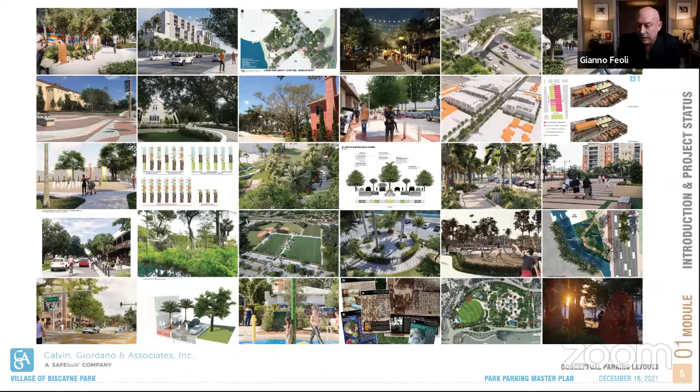So with that, I want to go ahead and do an introduction. I think everybody already knows who we are as Calvin Giordano Associates. We are a multidisciplinary firm, experienced in providing cross-discipline landscape architecture, engineering, and planning services. As the manager said, one of the things we were charged with was to...

Look and study the opportunities to formalize the parking and increase opportunities to protect the existing trees. Right now, as it stands, you just have a swale and people park at their discretion. At times, the existing sidewalk that runs around the perimeter of the park is in conflict with some of those parking arrangements, which creates a situation where you compromise your ADA accessibility for the facility.

Tonight's workshop is not a decision-making workshop. Tonight's workshop is an informational workshop. Following this workshop, once we hear comments, feedback and discussion, we will put together a schematic plan to take to commission for further discussion, and then we will put together revisions and bring it back to commission for final adoption.

Some of the considerations that we took on from the onset when we started the project was making sure that we do not negatively impact the ADA parking that already exists.

That ADA parking is there to serve the rec center building, and we want to make sure that we're not going to be impacting those. So we have excluded any improvements on the northwest corner of the block in front of the rec center, particularly because we don't want to impact that ADA condition.

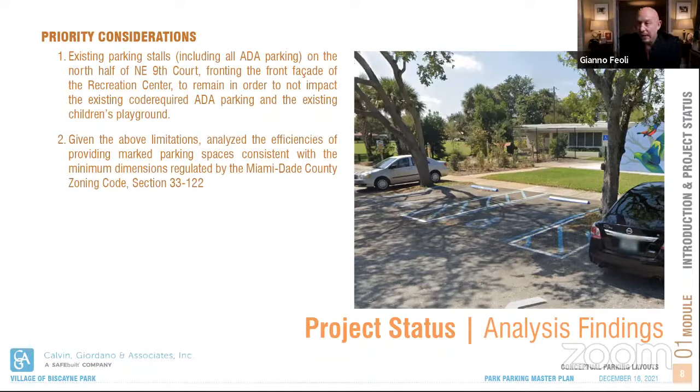In addition to that, we took a careful dive into the Miami-Dade County Code. The moment that we formalize parking, we now need to meet code requirements. The Miami-Dade County Code essentially has two stipulations we need to meet. One is the minimum dimension of the parking spaces, stated as 8.5 feet by 18 feet deep. Depending on if you're parking at an angle, parallel, or perpendicular, you have to have what's called a parking aisle, which is a clear space where a car can back out when exiting the parking space. So those were considerations we had to take into account.

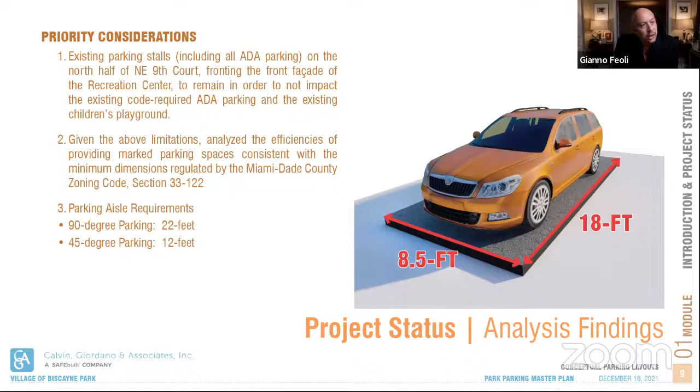And we have some solutions that we want to share with you. But I think the most critical of the conversations tonight is around trees and preservation of trees. I will say that we do not have the most ideal of situations because the trees are large and pretty majestic, but because they are there, we have to make sure that any kind of formalization of the parking is not going to negatively impact any of the existing tree roots.

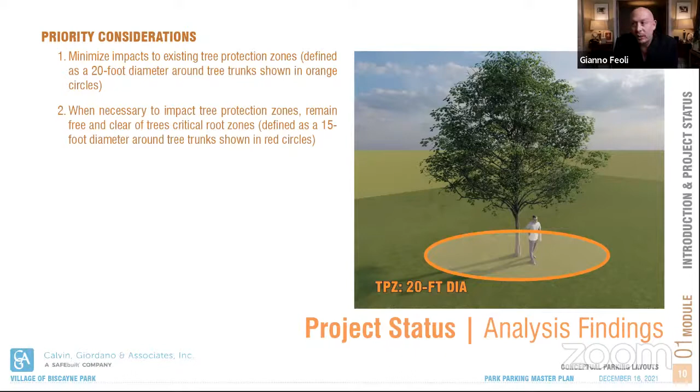So what we've done, in an effort to build a standard to apply to the park, is identify two different zones. One we're calling the tree protection zone, identified as a 20-foot diameter. Within that, we're identifying what we're calling a critical root zone at a 15-foot diameter. Now, a tree protection zone, best management practices recommends that you have a 1-foot radius of tree protection zone per inch of DBH, that's per inch of the diameter of the trunk of the tree.

So a lot of these trees are pretty large, they exceed 20 inches. If you have anything greater than a 20-inch diameter tree, then from best management practices you have a requirement to have a 40-foot diameter tree protection zone. Generally you have that proportional relationship with the size of the tree, and you generally don't take it beyond the drip line of the canopy.

For the critical root zone, generally those areas are defined from best management practices at 50% of what that dimension of the tree protection zone is. So you identify the tree protection zone based on the size of the tree, and half of that closest to the trunk you absolutely try not to touch, because those are the critical areas where the tree roots are.

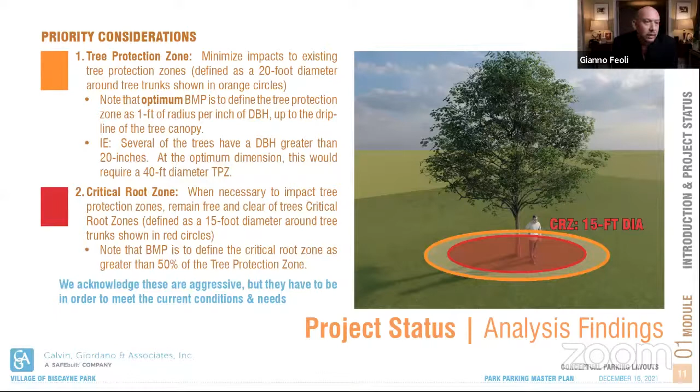Now, we know and acknowledge that having a 20-foot diameter tree protection zone around trees is a very aggressive stance. But when we look at the existing conditions, where trees are generally spaced anywhere between 18 and 35 feet apart, mostly on a 30-foot on-center spacing, if we were to go with best management practices, you essentially would have the entire swale of the majority of the perimeter of the park within a tree protection zone, and you wouldn't be able to do anything. So what we did is consult with some of our certified arborists.

They have done work in park areas and roadway improvements, and they suggested that if we stay 10 to 15 feet away from the tree trunk, that could be a reasonable accommodation that we could do. It's not ideal, but given the circumstances we're facing, that would be acceptable.

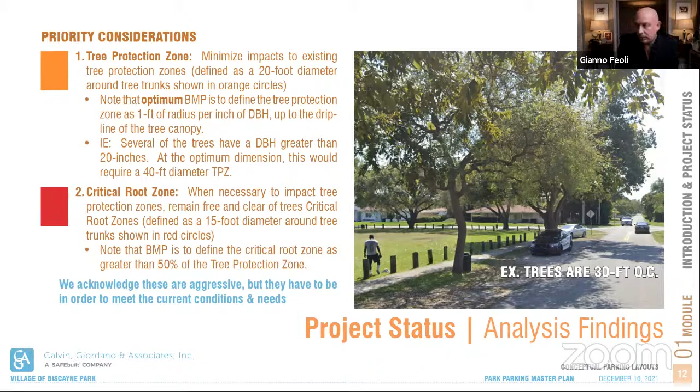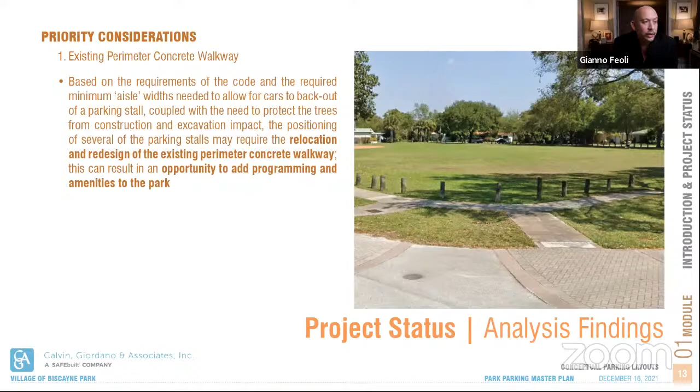In addition to that, the perimeter walkway that goes around the park at times is 15 to 20 feet away from the edge of the asphalt of the roadway, and at times is 10 feet away. So in order to accommodate parking, the location and alignment of that walkway will need to shift depending on the parking strategy and arrangement we're looking for.

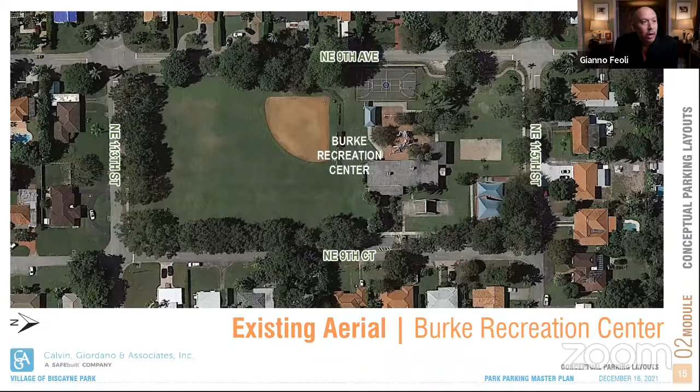So let me share with you some conceptual parking layouts, talking about all the parking around the entire rec center and the park area. When we look at all four sides of the park, no four sides are the same. In fact, you have variations along each frontage. At times you have swales being used for parallel parking, at times you have formalized perpendicular parking.

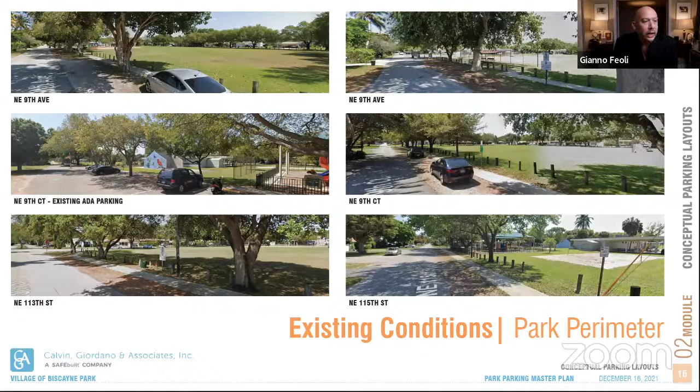And what we're trying to do, being conscientious of the economics of it, is keep as much of what you already have formally, and then look to see where we can augment the opportunities to maximize the parking.

So as we looked and did some analysis, we recognized that there are issues with the swales being overshaded, which means the sod will never grow there. And whatever we plant needs to be shade loving.

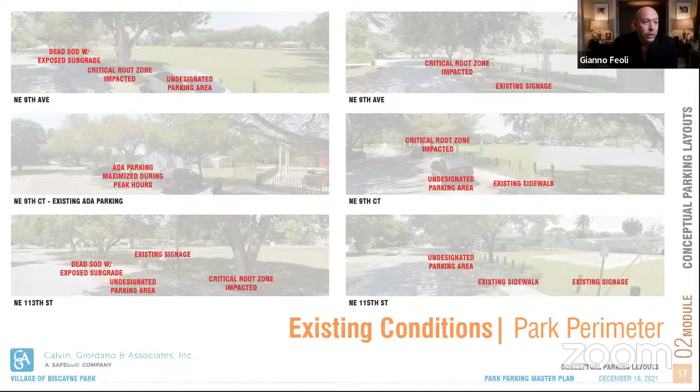We recognize that there's conflicts with the trees right now because there are no tree guards. We have observed people parking as close as a foot away from a tree trunk, which is extremely undesirable because as the cars park in those areas, what they're doing is further compacting the soil.

I'm going to share with you four different parking concepts.

Ranging from different strategies, looking at angled parking, looking at perpendicular parking. And what we were able to find is that at a minimum, we were able to achieve 51 parking spaces, and at its maximum, we could get as much as 64.

So I think that part of this also needs to be some feedback from you as to what is an acceptable carrying capacity that you want to have for your parking. Do you want to maximize all the opportunities for parking because you have that much demand? Or is there an opportunity to pick and choose where we want to put the parking so that maybe the parking target numbers are not as high?

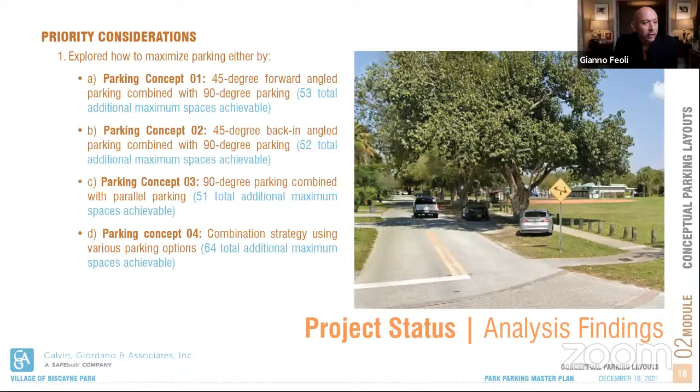And the one at the northwest corner at 9th Avenue and 115th Street already exists in that configuration, and we thought that it would be best to leave it in that way.

We then looked at, well, what happens if we only do 45-degree back-in parking? And that gave us a total of 52 parking spaces.

And then we looked at what parking counts we could achieve only doing parallel parking, parallel to the travel lane. Those gave us a total of 51 parking spaces. This is probably the least invasive of the strategies, but they gave us some similar numbers.

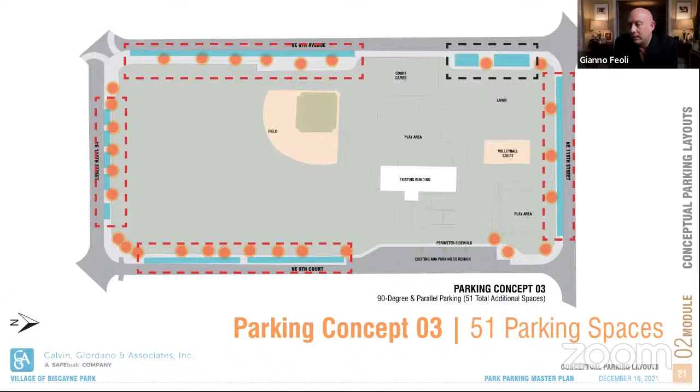So what we did was look at a combination, a hybrid of each of them, so that the areas shown in blue would all be parallel parking, because that would provide the least amount of impact on the existing sidewalks. The areas in purple would be angled back-in parking, particularly because Northeast 9th Court is a one-way and is a very narrow travel lane.

So if we were going to do drive-in parking on Northeast 9th Court, we would essentially have to push the parking further into the park in order to meet the aisle requirements that the county code has in place. And then the ones in red are the areas that we thought could accommodate perpendicular parking, 90-degree pull-in parking, typical like what you see in a parking lot.

We then looked at, all right, now that we've quantified what the maximum number of parking could be, which is 64 parking spaces, and this is in addition to whatever already exists in front of the rec center. Remember, we're not touching the ADA parking that already exists in front of the rec center.

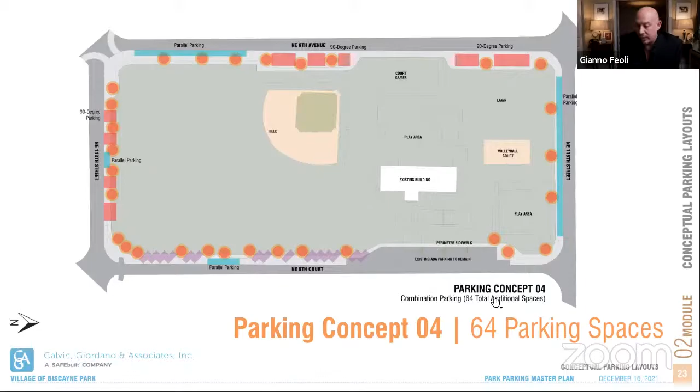We then started to look at, all right, how can we best protect the trees, and what can we do around the trees in order to minimize any kind of impact? It would be unrealistic for me to commit to you that any construction would not impact the trees. They all will. The effort here is trying to minimize what that impact could be.

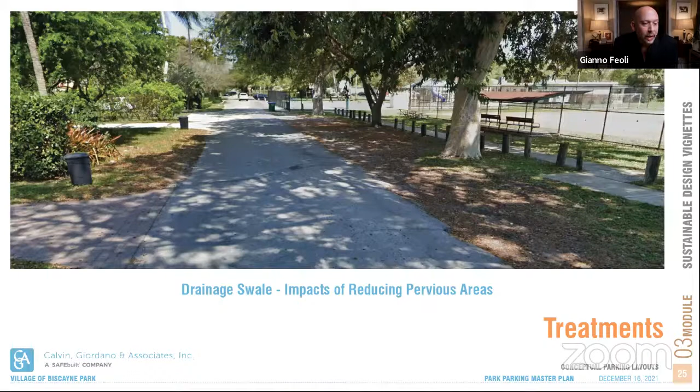Another thing that's really critical to consider is the fact that all of your swales are drainage swales. So we cannot pave over your swales, because then we may potentially cause a drainage issue and a flooding issue in the village. So we can only look at trying to increase some level of formalization for the parking while keeping some degree of perviousness so that the water can still percolate and drain in the natural form that it currently does.

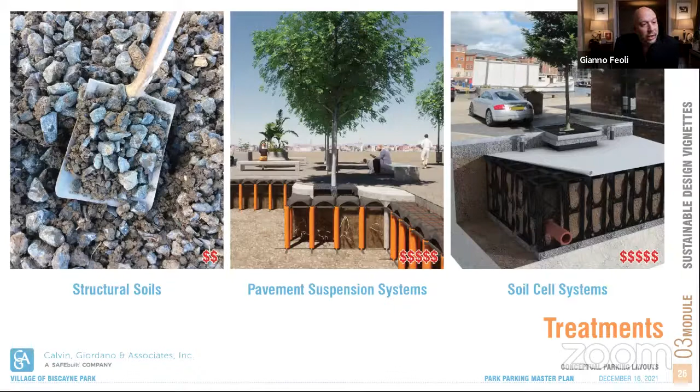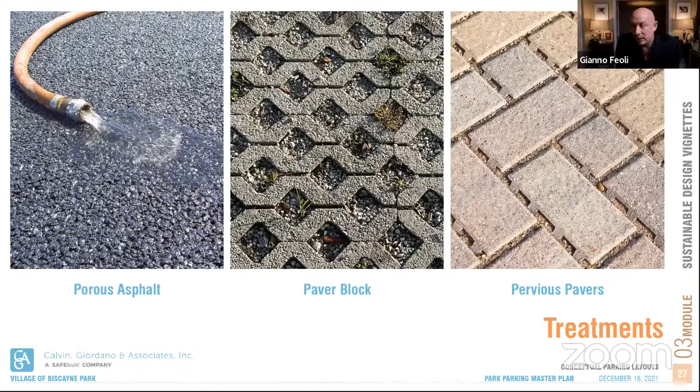Now, there are pros and cons to each of these different surfaces. For the asphalt, it can be done with some minimal excavation. It is going to require a subbase, and that depth will have to depend on a geotechnical analysis of the soil to find out what its compressive value is.

The great thing about porous asphalt is that if there is any settlement, you can always come back and patch it, which is something you cannot do with the other finishes. It can be easily striped, so you can easily get the designation for the different parking aisles. The only maintenance you really have to do is patching for any settlement, and periodically you need to vacuum it so that if there's any dust, settlement, or dirt in the asphalt, you can suction those out to maintain as much of its performative quality as possible.

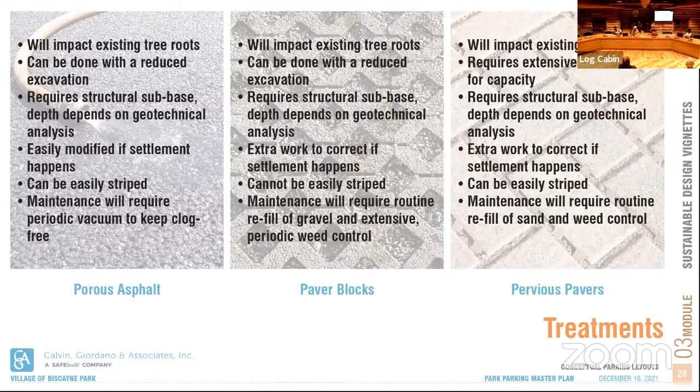Sorry, can I interrupt you for one second? Sure. Can you go back a slide? On the far right, on pervious pavers, you said that they cannot be easily striped, but your slide says that they can. Oh, I'm sorry, that's a typo. It cannot be easily striped because of the perviousness and the gap between the pavers—the striping gets interrupted. It just doesn't look very clean.

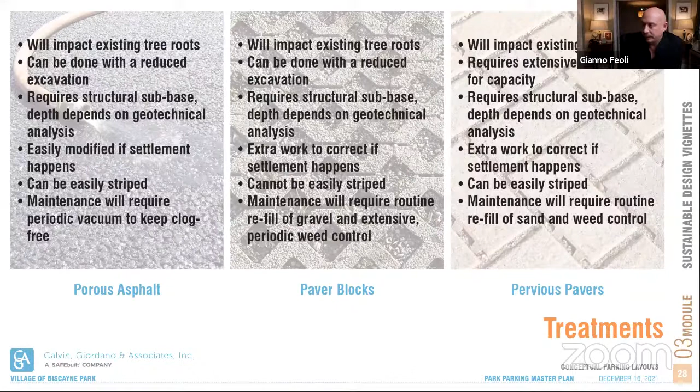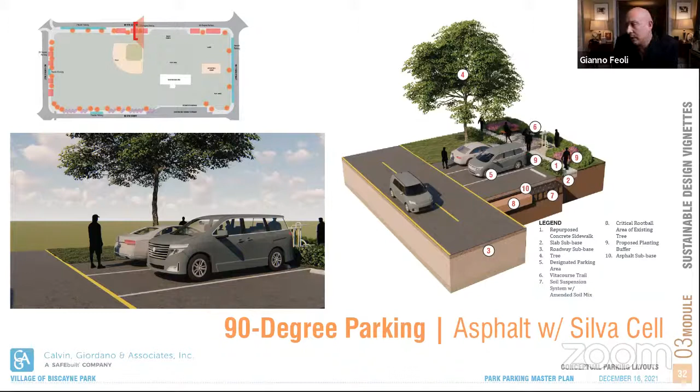Let's look at some of these scenarios so we can get a sense of what they will look like. With regards to 90-degree parking, when we look at existing conditions, there are generally two conditions we find: one where the sidewalk is pretty close to the edge of the travel lane, and one where it's separate. When we look at asphalt 90-degree parking over Silva Cell, it gives you a pretty clean look, very typical to the kinds of looks we're accustomed to. The only thing that really changes is the finish on top, because the system underground isn't visible.

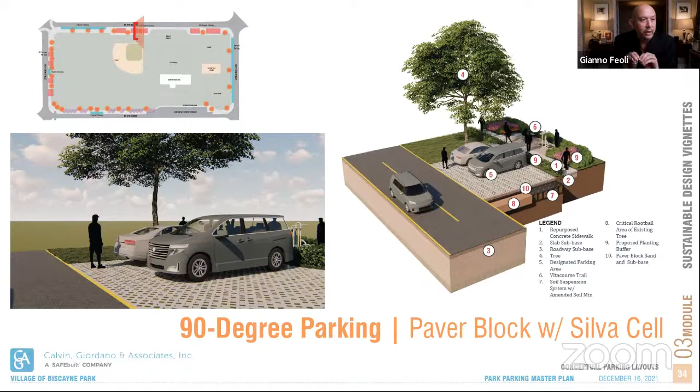So this is what it will look like with pavers, and this one with the paver block. Again, it's not going to have that sort of stippling of the green in the way it's shown in the rendering—we had to put that in just so it could be legible, but a reminder that because there's so much shade, the grass is just not going to grow. You're going to end up with gravel there.

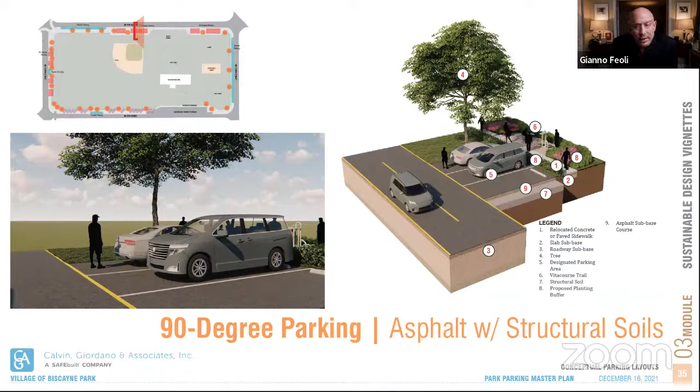When we change the system from Silva Cells to structural soils, the look is exactly the same, but the performance is different. So when we look at them for the asphalt, for the pavers, and for the paver block, it essentially looks the same—it just performs differently because of what's underground.

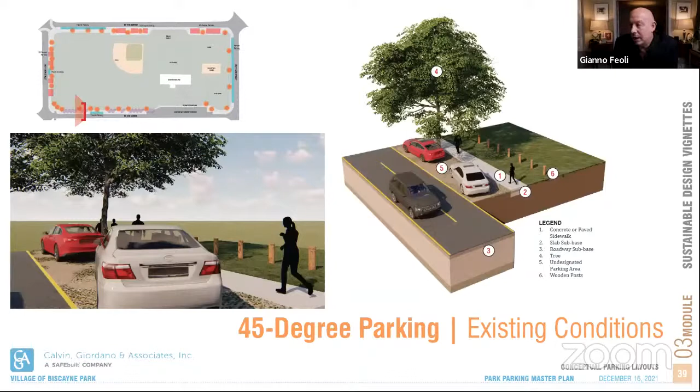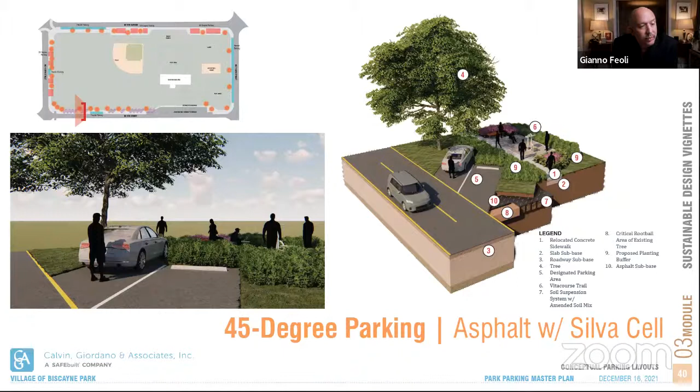When we look at the 45-degree parking, we try to mimic some of the parking situations we actually found when we went out there. We think that gives you a nice clean look. It will provide gaps in between where you can provide some landscape that brings that landscape up to the edge of the roadway, which could be pretty attractive. It gives us an opportunity to beautify that edge a little bit more.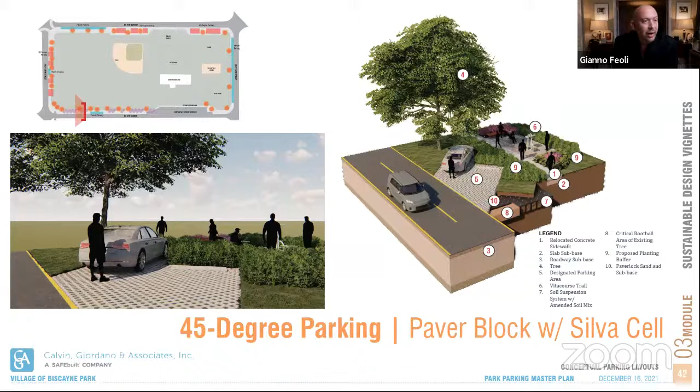You'll see what it'll look like with the asphalt and with the pavers, as well as with the paver block. And you'll notice that with the paver block, it reads more like a mono surface with no parking lane designation.

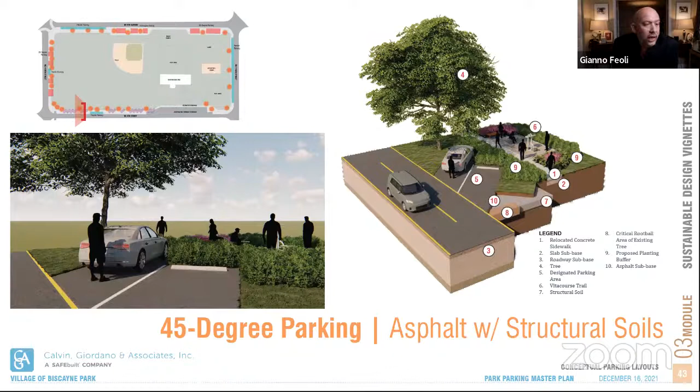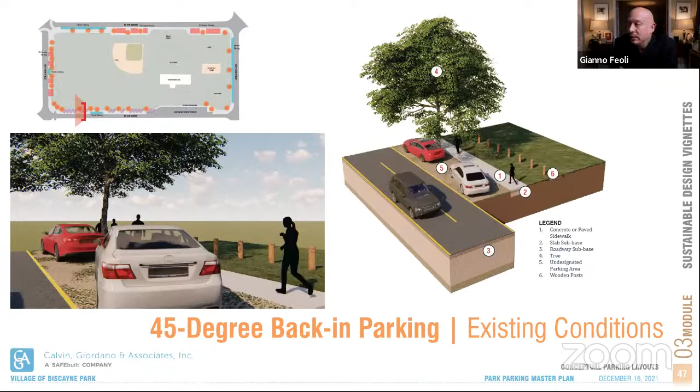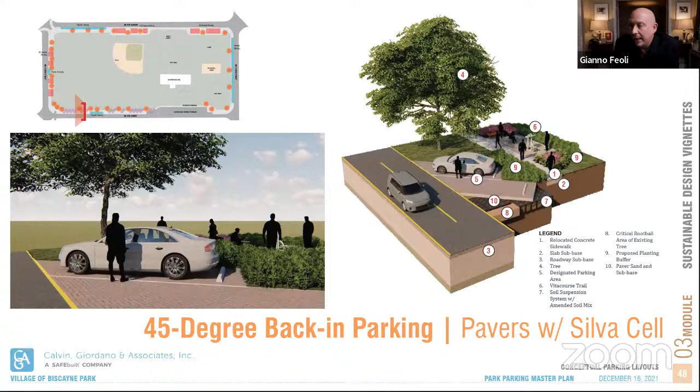Similar to how we changed the substrate for the structural soils, for the pavers and the paver blocks, particularly on 9th Court, this is where we looked at the back-in parking in order to not negatively impact that travel lane. So we have what it'll look like with the asphalt, the pavers, and the paver blocks. Similarly with the structural soils, as I said, the surface treatment is the thing that you look at, so you really don't see what's going on underground.

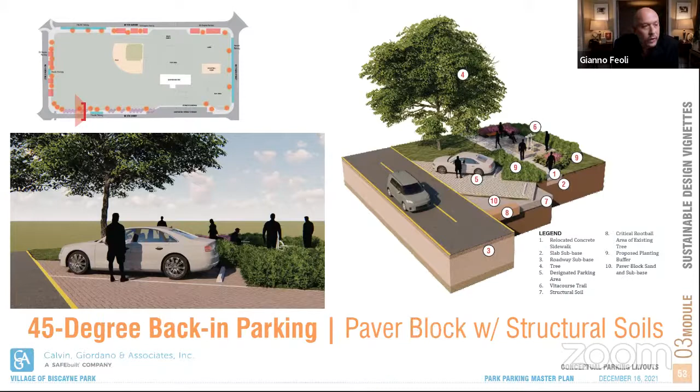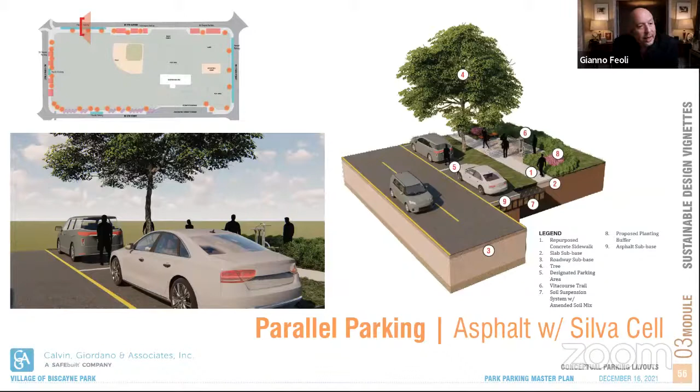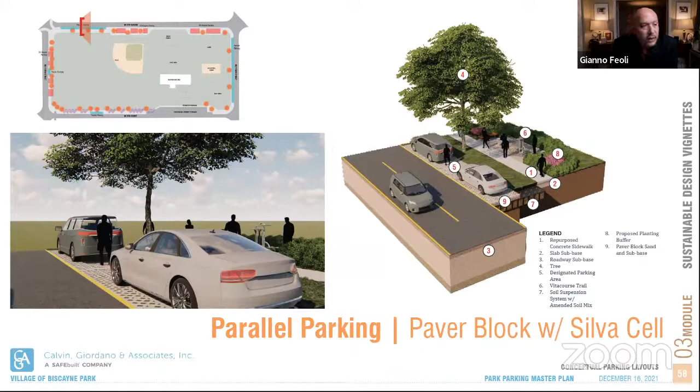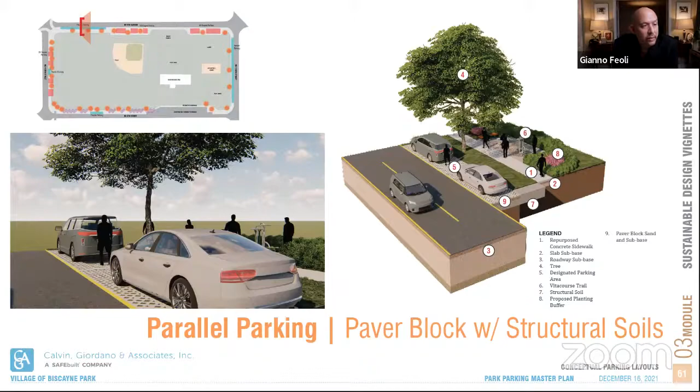And then finally, the parallel parking, what that experience will look like. Essentially, what the parallel parking does is make the travel lanes feel wider because you're adding more asphalt closest to the edge of the travel lane. What that does too is give us an opportunity to create a bit of a buffer and a landscape edge between the perimeter walkway and the parking that could be there. So a view of what that looks like with the asphalt, with the pavers, and with the paver blocks, similarly with the structural soils. The thing to stress here is that what we do underground to accommodate for drainage really has no bearing on what the finish is. We just need to pick the right finish to make sure we're not negatively impacting the overall area.

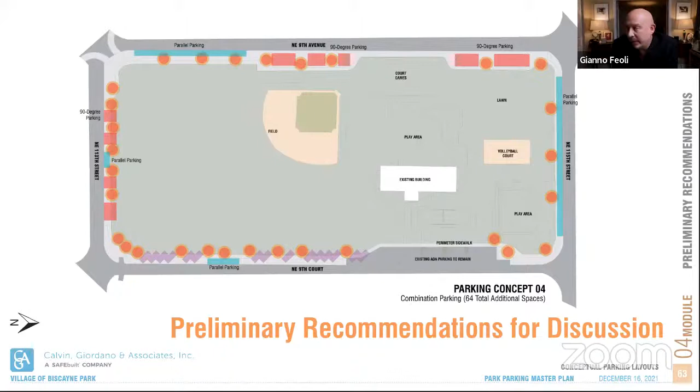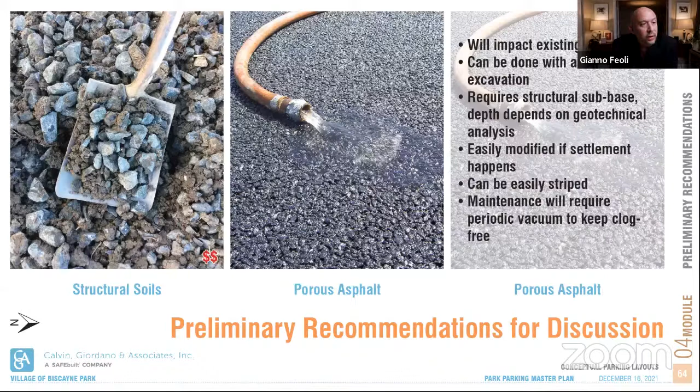In terms of recommendations, we are recommending that if the desire is to maximize parking, we go with that hybrid strategy where we mix perpendicular, angled, and parallel parking in order to maximize the opportunities to add those 64 spaces. With regards to a finish, we would recommend that we use structural soils as our subbase, and as a finish that we use porous asphalt, because of all the different options, this is the most cost efficient and the easiest to maintain. And just a look of what that will look like, given the different parking arrangements.

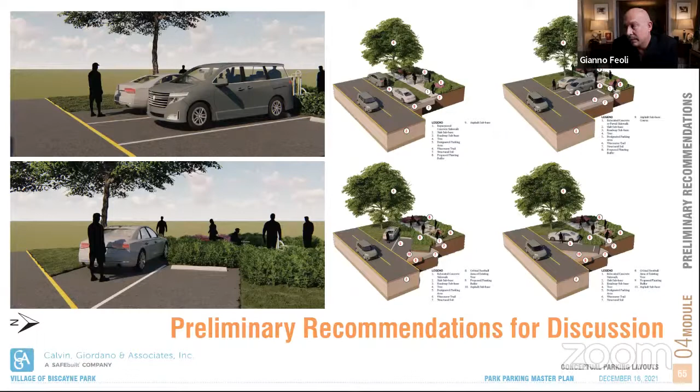And then, just to be overly cautious, which I think the fact that these mature trees exist merits being overly cautious, some of the recommendations we're going to be looking at as we put together specs for this schematic plan is to clearly spell out tree protection strategies that need to be implemented during construction. City of Miami Beach has a great detail where they use a chain link fence so that nobody can mistakenly back up into a tree and damage a tree trunk or a tree root.

We're also going to have to require that the contractor has extensive experience performing tree work. So in the qualifications of whoever is going to be bidding on this project, when that gets put out, we need to make sure, and we'll work with staff to make sure that language is there, that the right contractor with the right experience and the right team is doing the work. You don't want your daily run-of-the-mill landscape maintenance folks doing this. You have precious trees that need to be protected, and that's going to require an additional cost and additional investment. But if we don't do that, then we run the risk of potentially creating a slow death on those trees by choking them in a slow manner.

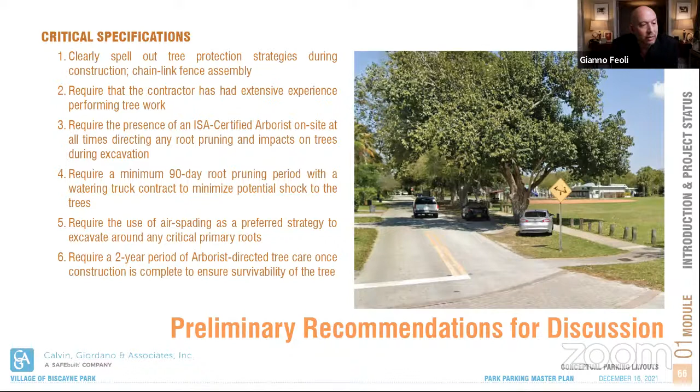We would require or recommend a 2-year period of arborist-directed tree care once construction is completed, to ensure better survivability of those trees, making sure an arborist evaluates the trees to check for potential dieback, shock, or any negative impact.

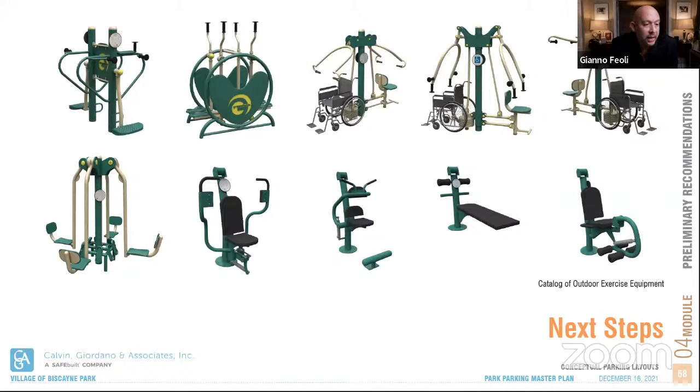Once we have the parking arrangement and those parking thresholds identified, we will look to maximize the perimeter walkway around the park to provide passive programming in the form of exercise stations, seating, and the creation of moments where these uses could happen. And then, of course, we would look at a furniture palette.

I still need to hear, and I'm very interested in hearing from the commission and the community, what kind of aesthetic you're looking for. When we did a presentation recently for the improvements outside of the log cabin, the feedback we got was that there was a desire to honor and stay true to the aesthetic and historical character of the log cabin.

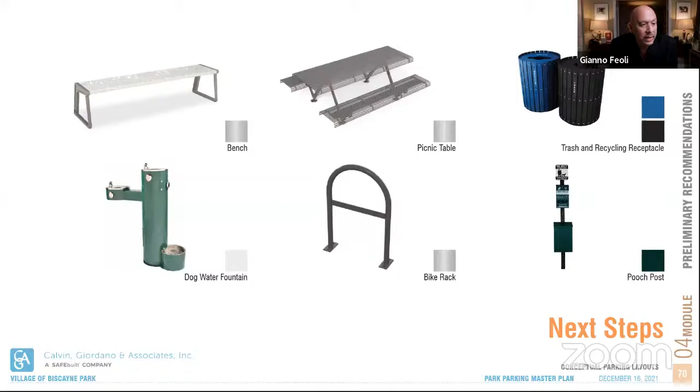I'm interested in hearing what the desires for the aesthetic are for this area. Do you want something that feels more contemporary and modern and up to date, or do you want to carry that aesthetic that will be done at the log cabin here as well? With that, I'll be glad to answer any questions, and I'm very interested in hearing all the feedback everybody has. Thank you, Gianno.

Just a reminder, this is when we first started looking at the project, and the commission asked Calvin Giordano to look at the park and what options are available. We always anticipated this might be a multi-year type of project when it comes to costs and what's available. So what we're trying to do is organize what the plan would be, what that end result would be, and then go back and see how we can break it up into various phases so it would be affordable over some time.

Ideally, it's always best to just rip the Band-Aid off, do it once, and we're done. But we do have plenty of constraints when it comes to budgetary concerns, so we would have to plan out how that would work over the next several years.

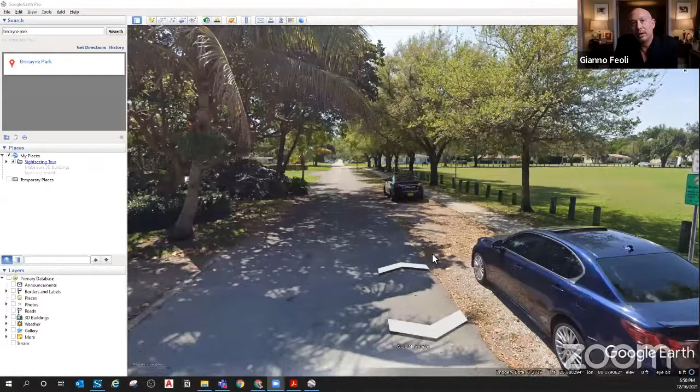On 9th Court, we will, because the sidewalk is pretty close to the edge of the travel lane. You essentially have enough space for parallel parking there. So if we are going to do angled parking, that sidewalk needs to shift. Let me share my screen really quickly - I have the aerial street view of 9th Court. This is 9th Court. If we're going to put angled parking, we would need to shift that sidewalk to the other side of the trees. So depending on the arrangement we want, that may trigger the need to do some realignment.

So when I was looking at that, what about the impact of the sidewalk on the trees? Well, the impact of the sidewalk on the trees wouldn't be as extensive as the swale parking, because in order to provide the swale parking and maximize the parking, we're essentially paving the entire area around the tree. Here, we're only doing one side of the tree. We'll have to do some minimal root pruning on that side.

I see a couple of people shaking their heads in the audience who seem to also know what they're talking about. As I said earlier, I'm not going to sugarcoat this - there will be impact to trees. It's simply a matter of selecting the option that provides the least amount of impact. But every improvement you're doing is going to impact the trees because the trees are large and have large root balls.

If we look simply at Ninth Court, is there any way of reducing the width of the road? Just enough to do the standards with the fire trucks, but not to have to move the sidewalk? Can you take half a lane? And will that give you enough space to do angle parking and be able to leave the sidewalk where it is? We'd have to check those dimensions, but my recollection is that has just enough to meet the fire department's standards. So we'll take a second look at that and see if that's an option.